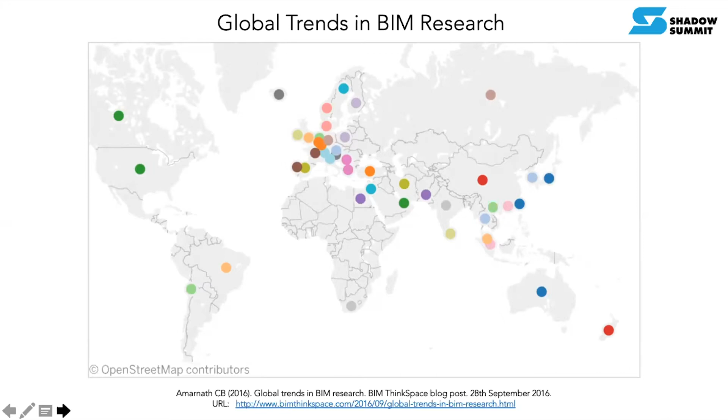And globally, there has been a lot of research effort from different agencies in the market to see whatever BIM we have currently in the market. If you want to know more about this, just Google BIM research and you'll find this article which I published in 2016, which was one of the top 10 research outputs for 2016 globally.

Looking into the BIM adoption efforts in the public sector, as you can see, wherever the spots are here, there is one or other kind of effort which has been started, kind of public mandates, either at a central level, state level, or from major clients. Once they realize the benefits that BIM can bring for them, and the kind of transparency and clarity in terms of the project, they realize that BIM makes a difference when they bring it into project implementation, and they're making it a prerequisite even for bidding for projects.

And nowadays within India also, there's a lot of key requirement from the client side now starting to expect BIM as an implementation procedure for projects.

And nowadays, recently, I see there are also 1 year, 2 year masters programs coming up, especially designed for BIM as education. Looking into the Indian market, there are only a few basic courses which have been introduced, and there's a lot of work required to be done on this.

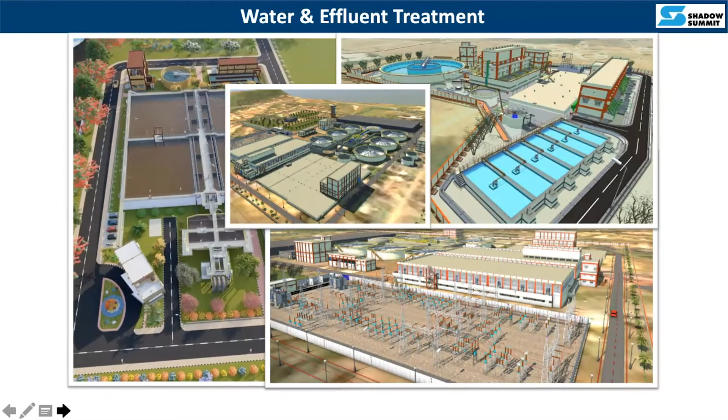Coming to some of these slides, this is with respect to my company, L&T, Larsen and Toubro, one of the mega contractors for the Asian market. We do have BIM implementation. My role here is focusing on formulating strategies for the organization, supporting skill development programs, and understanding what's happening within each individual company, to help formulate strategies for the organization.

I can show you some sample slides about how BIM is getting implemented. Currently we have 700 to 800 mega scale projects running in our company, each ranging from 1,000 crores to 30-40,000 crores. Even though BIM is often used for real estate sector projects, at L&T more than 40 to 50% of our projects focus on BIM. It may not be complete project lifecycle management, but design and build is happening with these implementations. There's also a lot of requirement coming in from the client side for BIM in projects, so it's happening.

This is one sample project showing water and effluent treatment, where modeling is done with BIM. For some of these projects, no CAD drawings are used - they directly use the modeling first and then extract the drawings from it. They're also using it for better coordination meetings, visualization, and time planning.

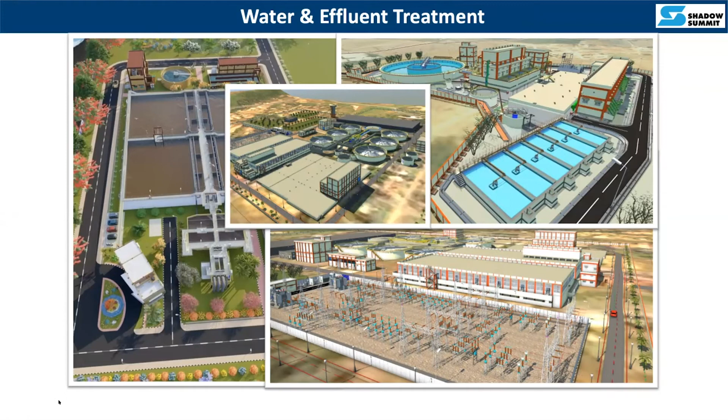This is for combined utility of smart infrastructure projects within the company. Here also 3D and time planning, cost planning, and common data environment setup - this kind of activity is happening.

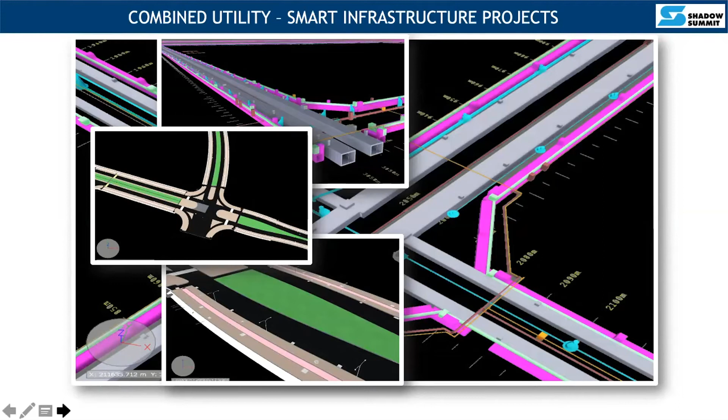This is for most of the metro, ports, and harbor projects. Some of the metro projects coming recently all have BIM requirements set for Indian projects. Most of these projects incorporate BIM for design and build, including CDE maintenance and handover. Some projects within the company, like airport projects, have been planned for utilizing it for smart facility management - they need complete detailed requirements when you hand over the projects.

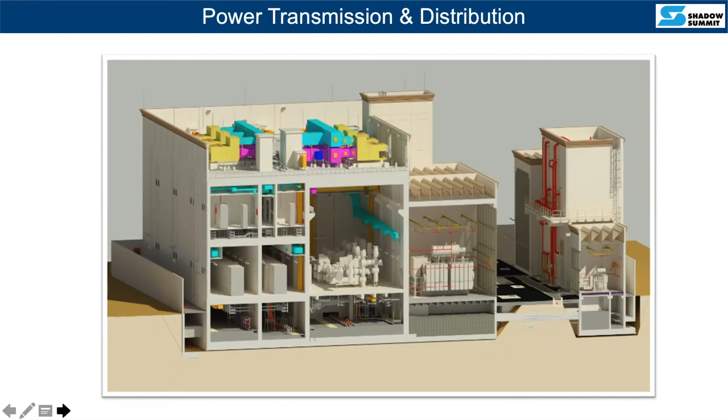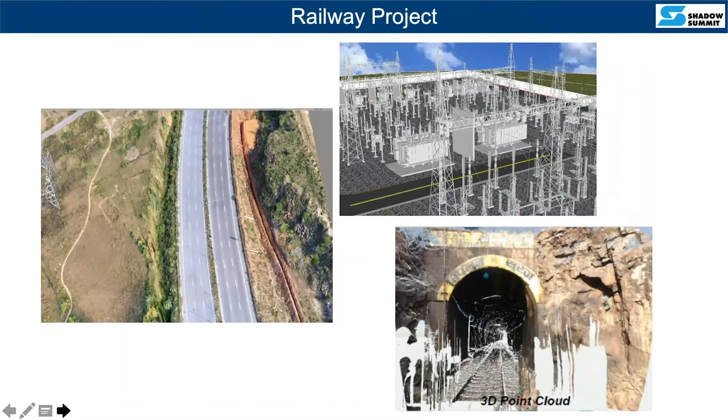Coming back to the society, this is the India BIM Association, which was set up in May 2016, mainly focusing on four areas. One is education and training, which is most important, because if you want to do something you need a skilled workforce. That's one area where we support different universities in curriculum development and vetting, and also for awareness sessions and so on.

The second area is supporting certification of programs and also checking the maturity of implementations. The third is we organize several sets of events day in, day out.

At least monthly, we have 15 plus events happening to support industry, academia, and different agencies. We collaborate at that level, and also focus on organizing several sets of workshops. There are several activities happening through the society. Since we started in 2016, different kinds of forums got set up in other countries.

So the impact of this India BIM Association in the Indian AECO sector for digital transformation is that it activated tech vendors, industry professionals, policymakers, academia, and research industries to collaborate for digital transformation, where we connect these dots so they can exchange their areas and services and get much benefit out of that.